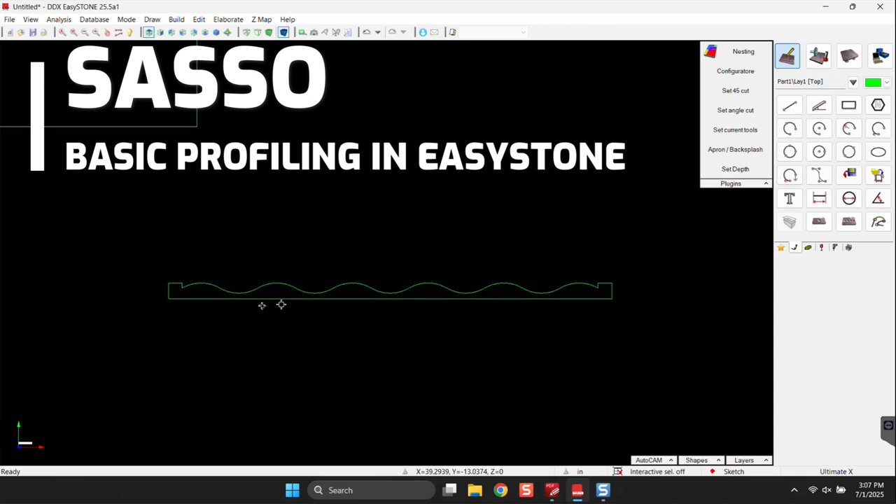My name's Daniel. So today I'm going to show you how to do some basic profiling in Easystone.

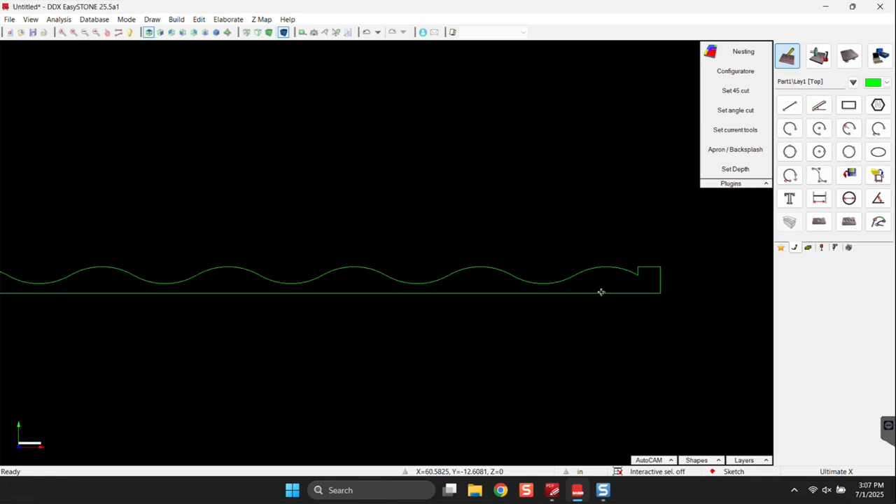So I've already got my part drawn. As you can see, this is what I want to do. This seems to be kind of a popular thing right now. People are doing these little hoops. At any rate, I just drew something. I don't know if it's exactly how people would want it, but there it is, right? Got it. We're drawing it from the side, so I did that.

If you don't know how to draw, you should probably try to learn. I mean, not to be a jerk, but I'm just saying, like, you kind of need to know how to draw, how to do this kind of stuff.

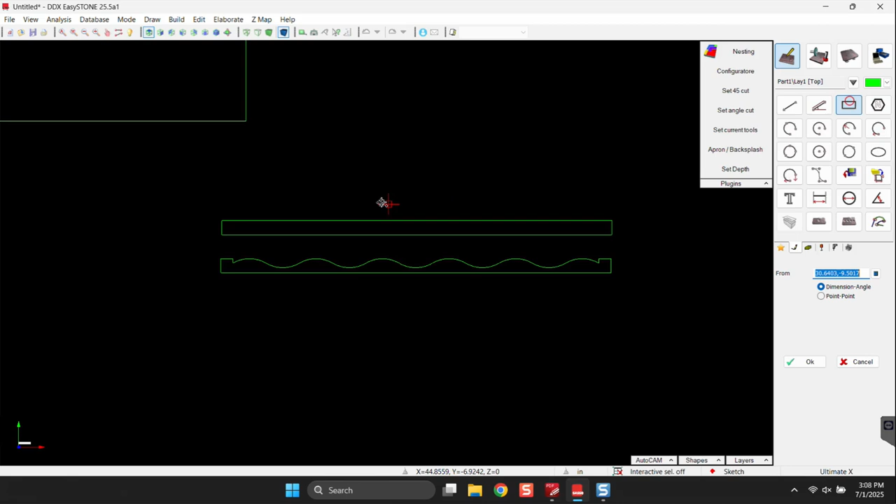So I'm using rectangle. I drew the length that I wanted it to be and the height for the thickness of material. So I'll show you again. So there's the height for the thickness of material, boom, angle, just hit OK, whatever. And then just draw your shape. Draw it exactly how you want it.

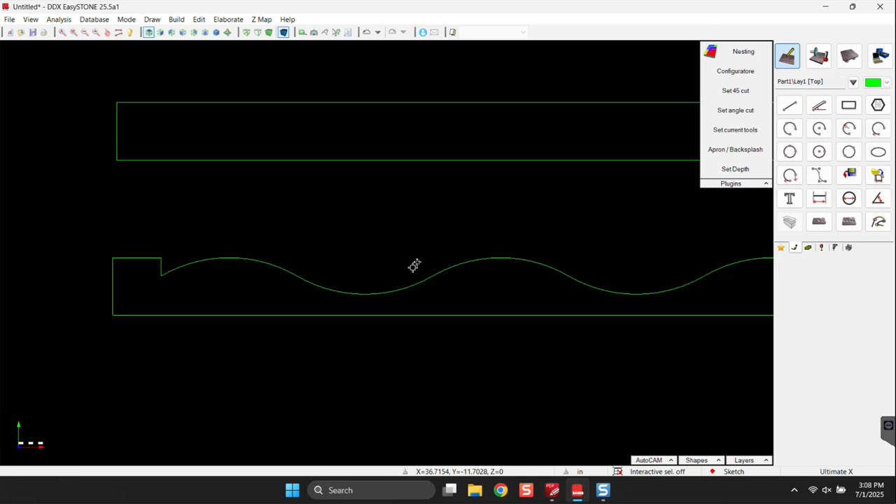I took some time. I drew this one using 3-point arcs. So I just did a little like 1-inch step over. I think I did 3/8 down, and then I just did some 3-point arcs. I reversed one to make it dip down, go up, down, blah, blah, blah. Anyways, I'm not going to get too lost in the drawing aspect of things because honestly, this is not that video. The drawing video is going to be a different video.

This is advanced, more like you got your gold star. It's time to move on and do something cooler. This is a pretty simple one. Yeah, we got the piece drawn. So this is the piece that I want to work with. Just height and width. We'll pretend like this is our remnant or something, and we're going to put this on there.

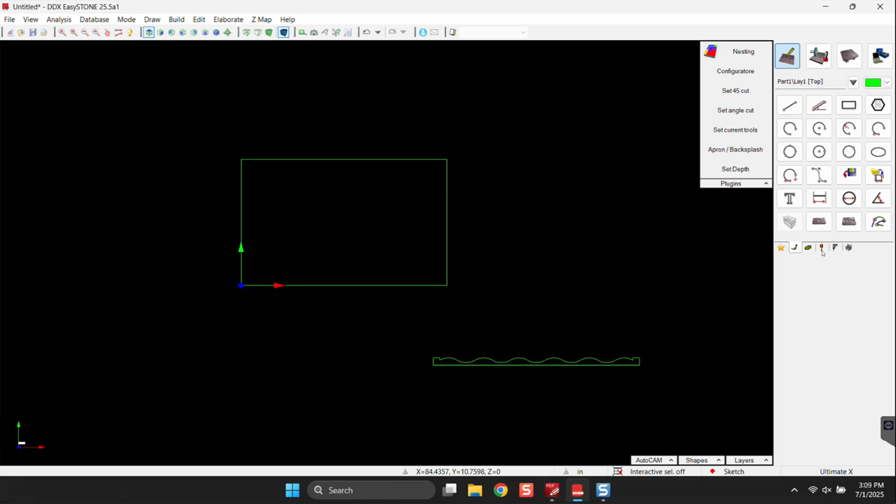Okay, so to do that, we're going to go to the Build tab here. Boom. And then we're going to go and do a frame. All right. So first thing, it says select the guide. So for me, I'm going to say, okay, the guide, boom, that's my guide. The section, I don't know, the wording's kind of weird. Basically, that's our profile. So I'm selecting, you could do just the top.

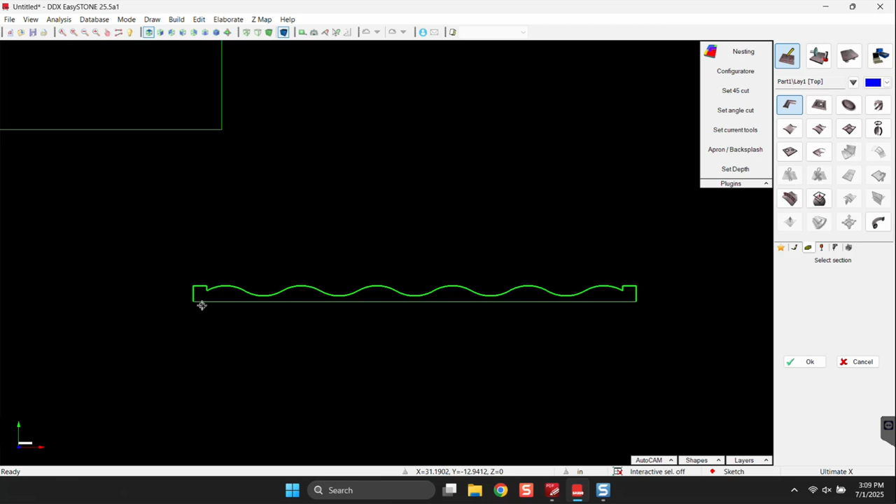I'm going to choose the sides too, might as well. And I'm going to deselect the bottom because I don't want the bottom. I just care about the top and the sides. So hit OK. And you'll see I've got this blue object. If I go to a 3D view, we can see that that's actually our profile there. And let me go this way so we can see what's going on better.

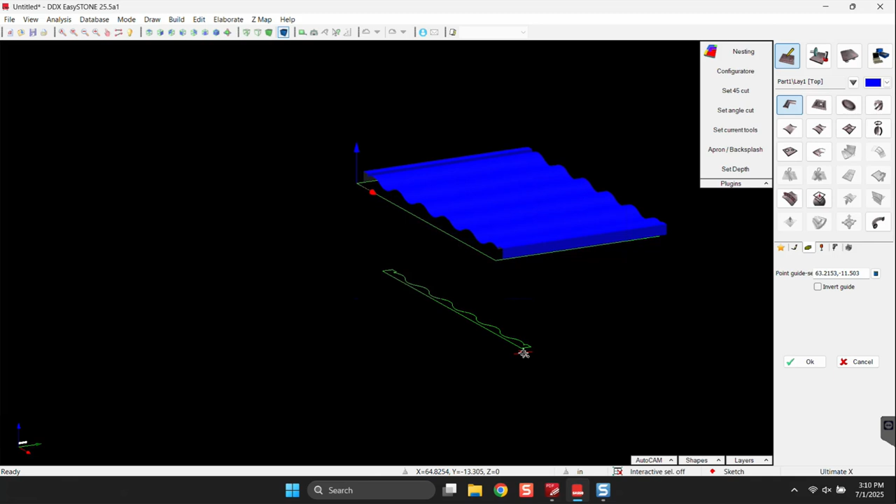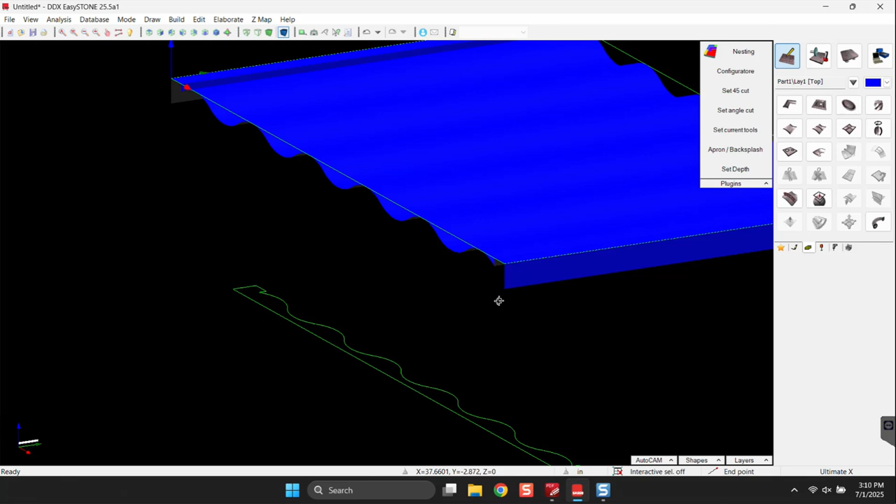It wants us to pick where we want the 0 point to be. So where we want it to start from. So do I want it to start here or there? Normally on our machines, we always start from down here. So I'm going to go end point. So I right clicked and then I went end point and I'm going to say, okay, I want it to be like that. We can see, we're going 0 down into the stone. I have seen it both ways, so at any rate, that is that.

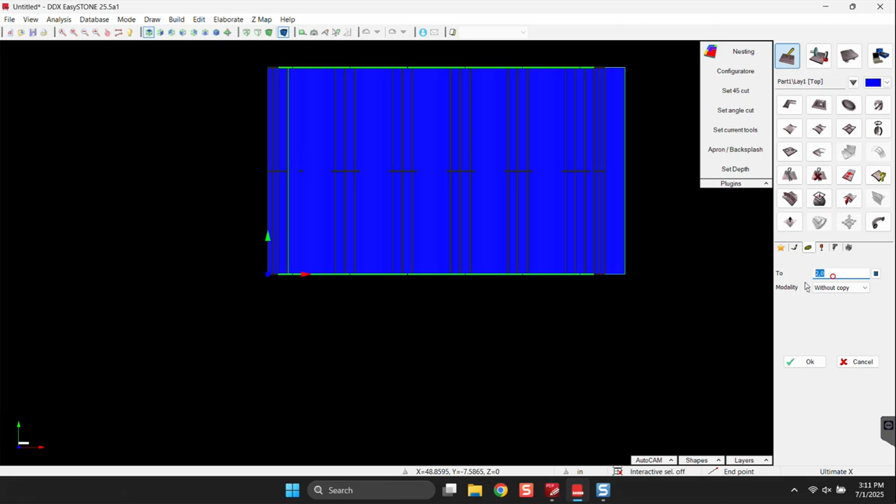At this point, to make it easy on yourself, just delete this profile. Boom, there we go. And honestly, this is fine the way it is, but you might want to get it away from the edge a little bit. Let's just move it like 2 inches from there and maybe an inch back. Boom, okay. All right, go to our machine tab, and these are your different views. I'm just doing a 3D view so we can see. So our thickness of material's here, that's fine. We're just gonna hit OK.

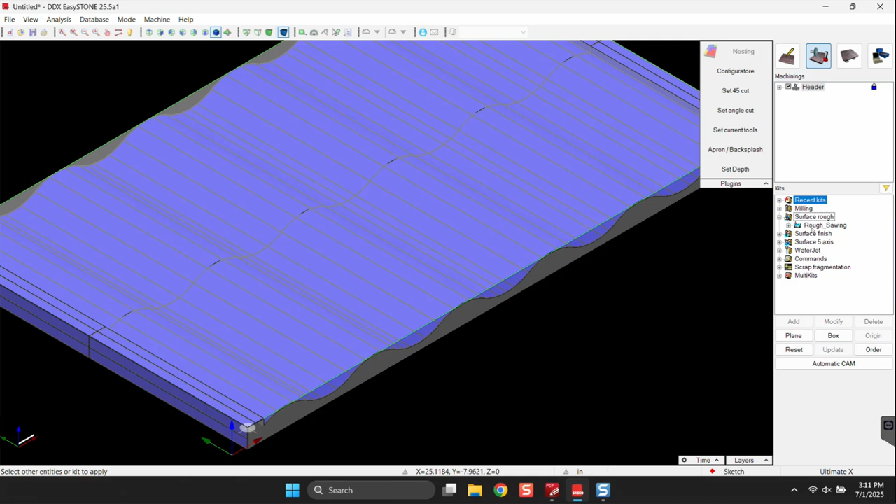All right, so we're gonna select our profile. So I just clicked on the blue curves. We're gonna do a surface rough routine. So the roughing cuts, those are gonna be like your slicing cuts. Okay, so I'm just gonna hit that and go to add. All right, that's pretty much it.

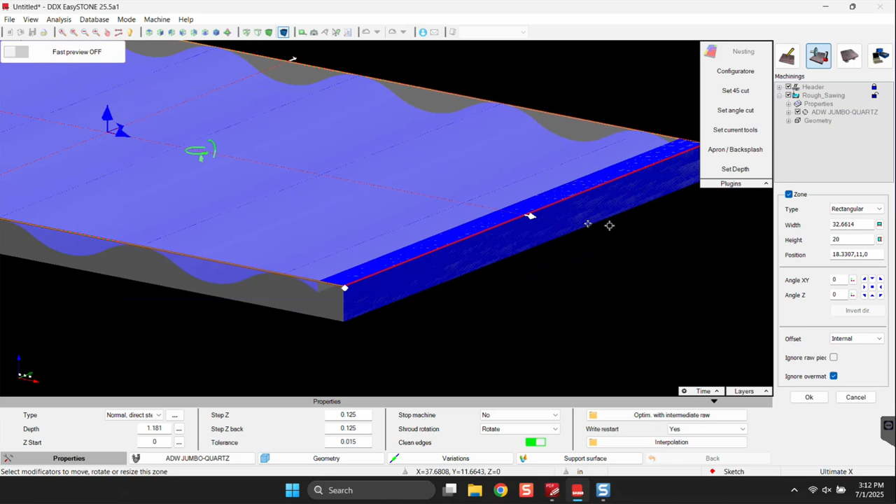Normally I would set the zone that I want to work in, so I'd hit contour and zone, turn the zone on, and this allows you to tell it where you want it to cut. So this is to size, so I could pretty much just leave it as is. But if for some reason I didn't want to cut up here, on this flat surface, I can walk this zone back and I can say, okay, do a midpoint, boom, I only want to work in this area.

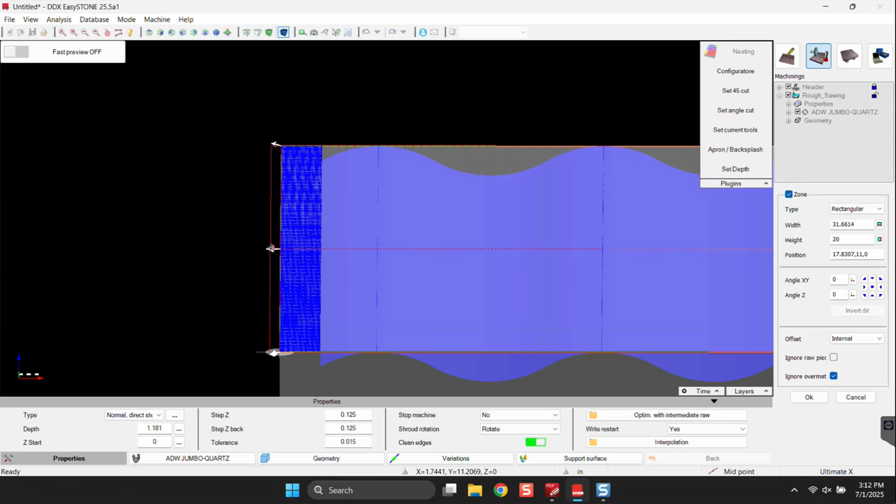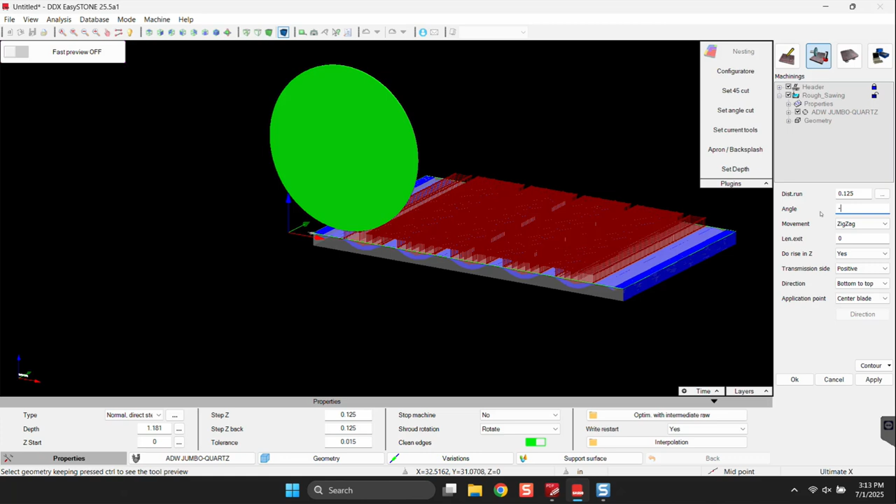So that's pretty nifty. Same thing on this side, we could say, okay, work there, boom. Okay, that's it. Hit OK, hit apply. The direction's gonna be probably wrong right off the get-go. It's cutting left and right. We want it to cut probably forward and backward so it can get into these grooves. So to do that, we're just gonna change the angle here. Let's try maybe -90 and then hit apply. Boom, there we go.

Beautiful. It's gonna go in there, boom, boom, boom, boom. Cut this stuff out. There it is. All right, sweet. So that is roughing.

So now rough sawing and brush finishing, those are kits that I have created. I created those for a specific customer. And honestly, if you are a Sasso customer, I can hook you up with these. If you're not a Sasso customer, just make your own. It's super easy. And if you can't wait for me to send them, you can make your own. They're pretty straightforward. I think your Easystone comes with some loaded already.

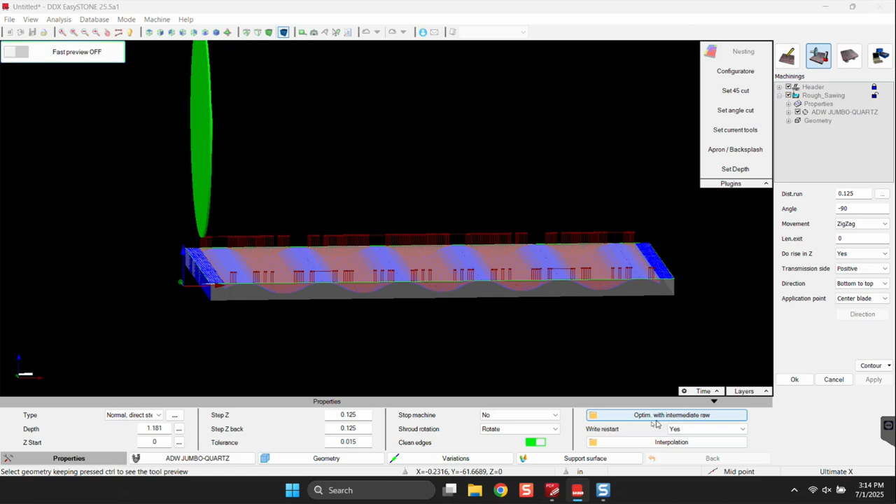All I've done is set some different settings in here, like an 1/8 inch step forward and backward, different tolerance, the step direction, random little settings. All of that is saved. So at any rate, if you're a Sasso customer, I'd be happy to hook you up with these. But if you're not, honestly, you can just make your own pretty easily.

Okay, so we did the slicing cuts. Now we're going to do the finishing cuts. Same process. I'm going to click the blue curves. I'm going to hit surface finish, and I'm going to do brush finish saw.

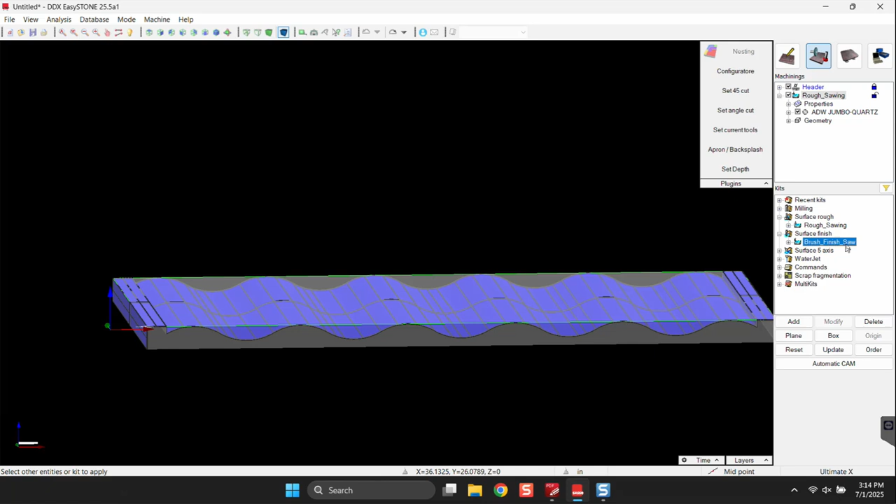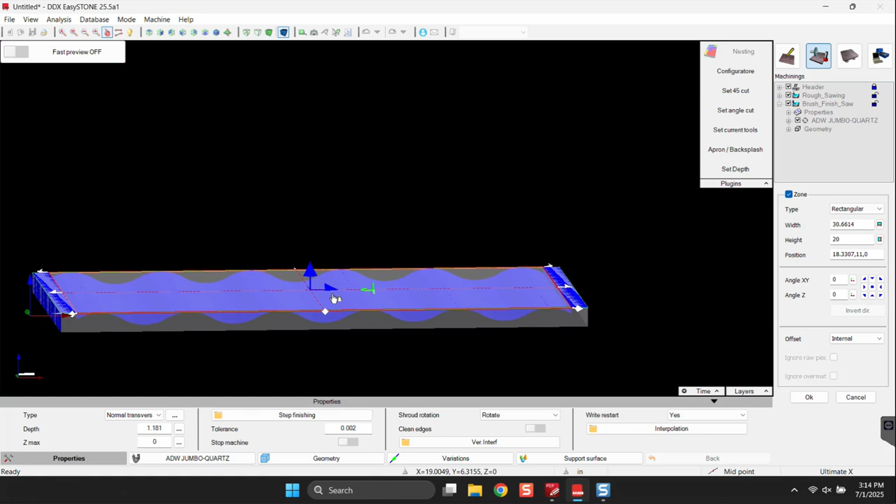That is that. We're going to hit contour, set our zone to where we want it. Boom. We can do the same thing. Walk this thing back. We don't need to go up on the face of the stone if we don't really need to. And that is that. So I'm just telling it where I want it to work in. Go ahead and hit OK, hit apply. Bada bing, bada boom, baby. There it is. So we've got some nice little sweeping motions there.

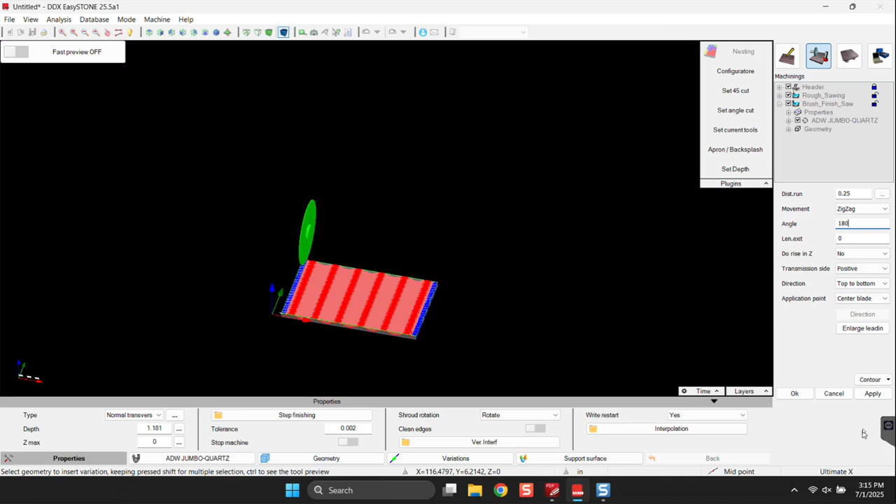One thing to think about is the water direction. So for me, I already know the water is going to be spraying out this way. Honestly, that's okay to avoid the limits on the left side. But if you wanted to flip it around, just hit angle, I guess that'd be like 180. Let's try 180. Bam. So there we go. We flipped the direction and now the water would spray to the back. That is it, my guy.

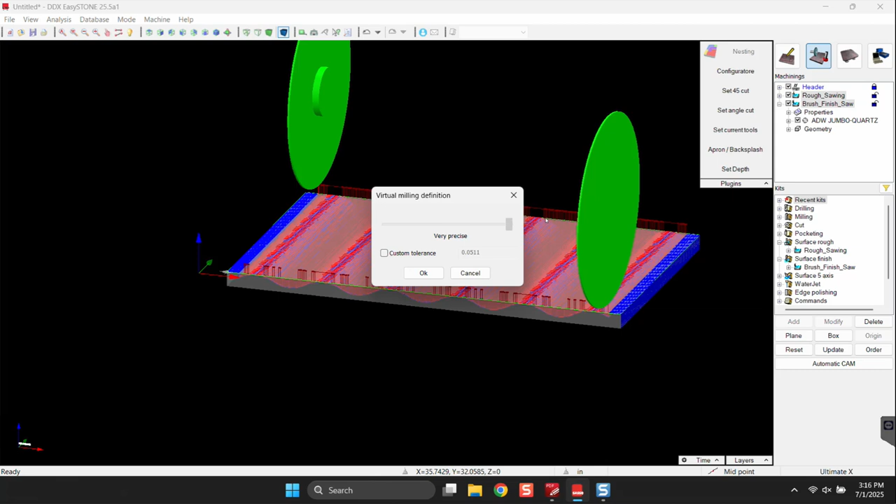If you want to see this, you can see this multiple ways. In this screen, in the machine tab, you have something called virtual milling. So if you right click on your thing, so I selected both of them, held control, selected both, right clicked, and then went to virtual milling. And we can execute a virtual milling as a whole. You can tell it how precise you want it to be with that.

I don't know, this is not very intricate. We could probably just do balanced. Hit OK. It's going to load up. You'll see it's going, going, going. And this is going to show us what the finished product is going to look like.

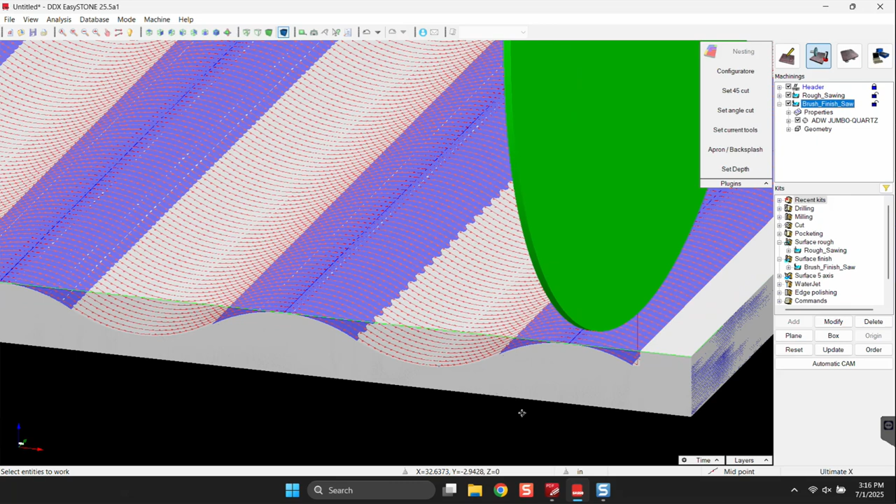And we're done. Sweet. So as you can see, it kind of changed to this white color. That is to simulate the material. So that is that. Let's see if I can just try to see this without it. There we go, there she is. Yep, got our nice little humps.

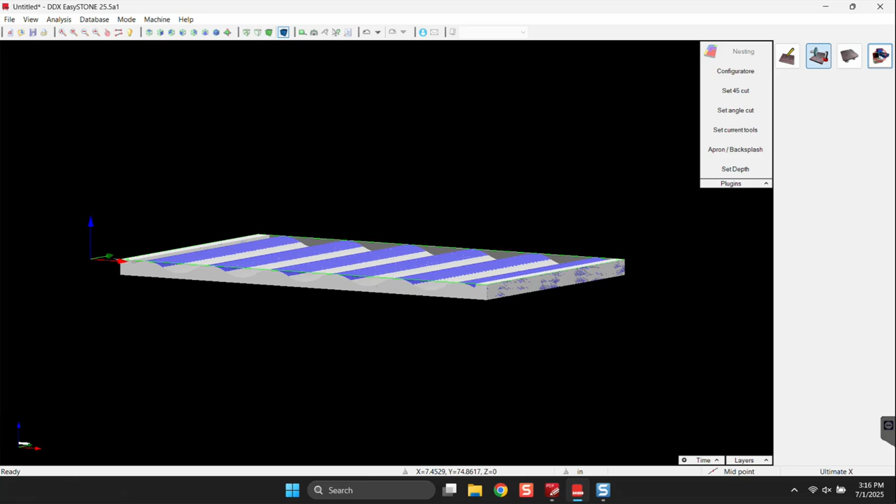Sweet. So let's pretend we are done with this bad boy. So there's our piece, whatever. Generate the program. I keep calling it humps. I'm going to name it humps. Done.

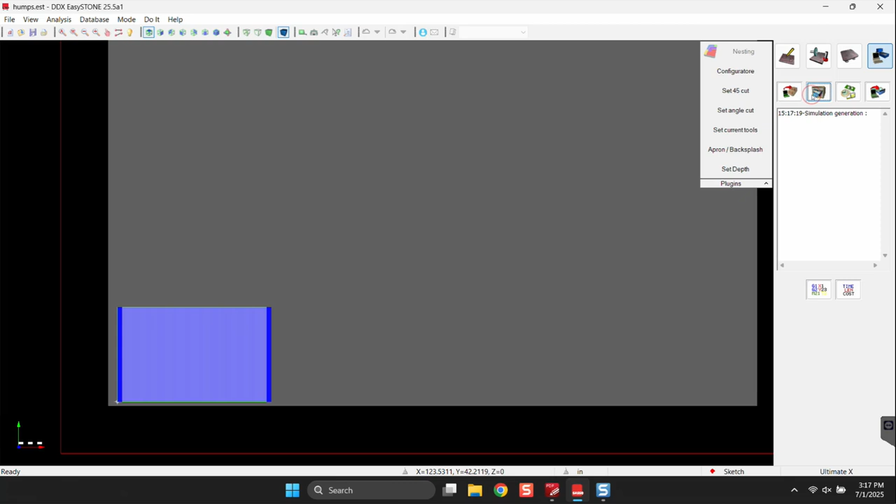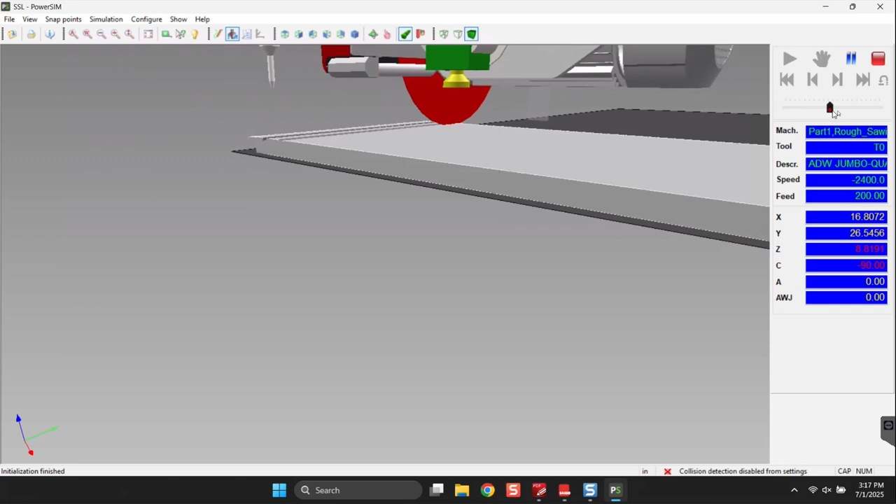Yippee skippy. Run our simulator. If you really want, we kind of already did that, but really that is it. I make it look easy because I have these kits that have already been saved. You might not have those. If you're a Sasso customer, I'd be happy to hook you up with those. If you're not, honestly, you can make your own, but the guys at DDX are super helpful too. If you call them or email them, they will be happy to get you squared away.

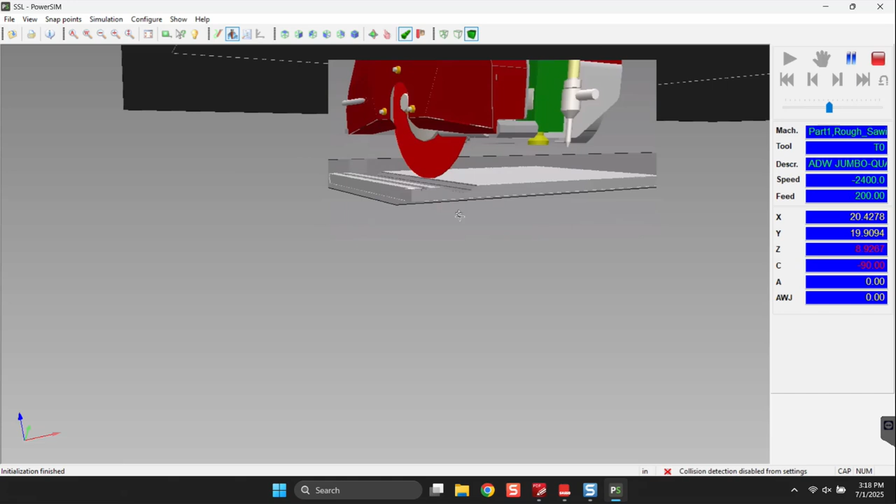I'm gonna just blaze through this. That is the fastest speed we can go. This is a simplified simulator. Might not look simple to you, but you should have seen it before. It had like the walls and everything.

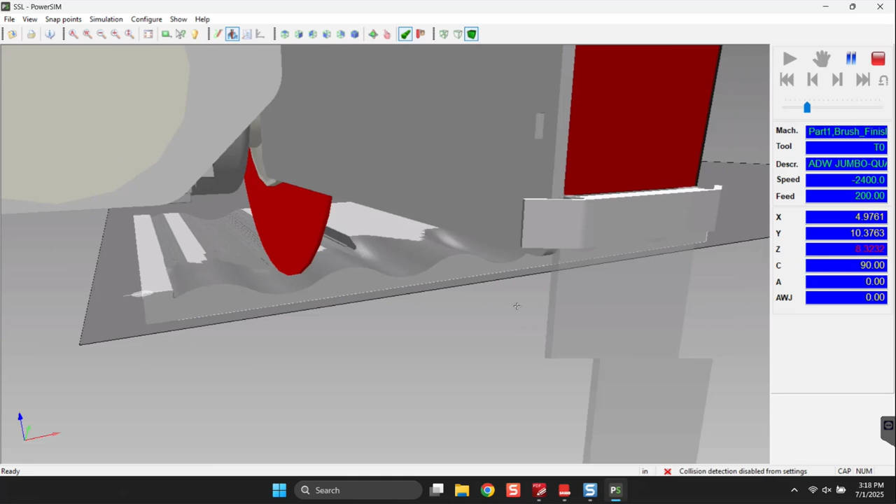All right, you get the gist. Goodness, that's pretty much it. Yeah, that's profiling in Easystone. It's really not too intense. The hard part is just getting your kits set up. Once you have those, it's just a matter of drawing it and applying the kits to it. The kits have saved pretty much everything.